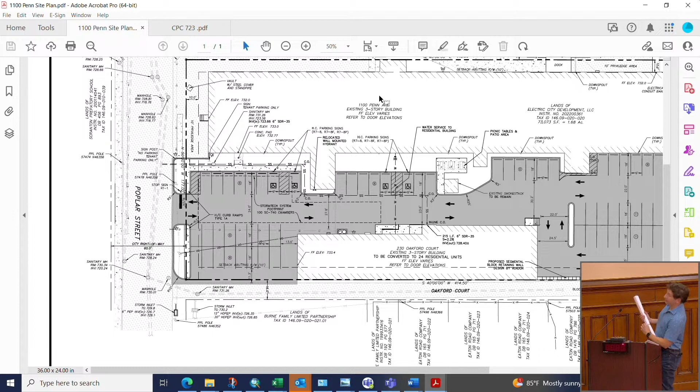Yes. I'm Jude Caldwell, engineer working on behalf of Electric City Development. My apologies, I could not make the meeting last month, but I'm here to answer any questions that may have arisen at the meeting. I understand there were some questions about the landscape plan and perhaps the sidewalks. I did bring with me several copies of both the site layout and the landscape plan, if anyone would like to look. I guess it's right behind me on the wall as well.

Yeah, I couldn't find a landscape plan in my set, so I don't know if... Well, I do have it right here. Okay. If you have the landscape plan, you could just bring it up. We could take a peek at it. So you haven't seen that yet, Don? I couldn't find it in my packet. Okay.

Added a planting strip along Poplar. So the comment was there's a paved area setback, so we have to add this planting strip in between where the parking area is and the sidewalk. So this 5-foot strip right here is part of the landscape, that we refer to as this 5-foot strip in between parking. Okay. So what happens on this side? There's a sidewalk. What's happening here? Looks like sidewalk, but we've got some plants over that too, so.

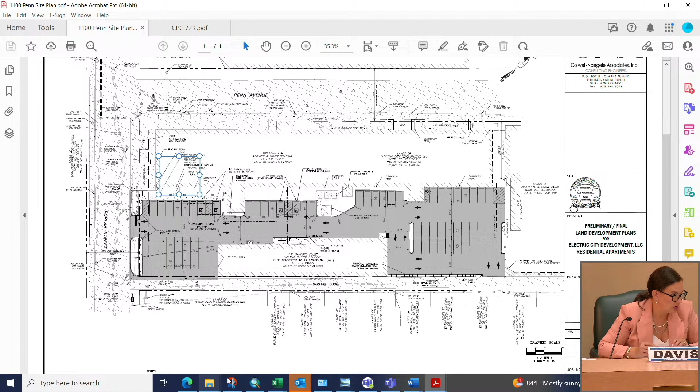And so what is it? So the thought is that we will address the building or... So the project being developed is the conversion of 230 Oakford Court, correct? Which they did have on sidewalks in front of it. And then what is the accessibility?

Don, can you bring up the street view of that lot? Yes. Yeah, I think it's just a parking lot. It's just like asphalt paving that goes from Penn Avenue all the way down to, yeah, so there you go. Yeah, part of that's concrete. Right. This site plan does not show those parking spaces. So those parking spaces are to remain? Parking spaces in front of the existing building. Right.

You said that building's unoccupied right now. We might, I shouldn't speak on behalf of the developer, or maybe somebody in the very front unit. Okay. I'm really not sure, but the vast majority of it is. Right. Yeah, I feel like there's a new-looking sign on the front door there, like Lavelle and Associates or something. Oh, wait, you can see it? Oh, there you go, yeah, Lavelle Strategy Group.

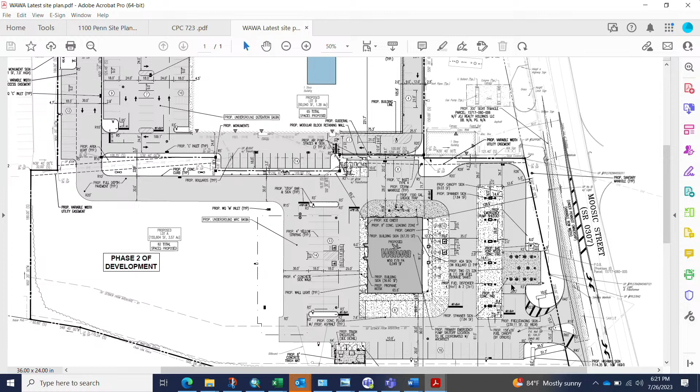Certainly. Good evening. My name is Josh Sewald. I'm from Dynamic Engineering Consultants. We're the civil site engineer who prepared the drawings that are located behind me. I do have a few other exhibits and renderings. We actually rendered the site plan that's located behind you, and we do have architectural elevations too of the proposed Wawa. So at any point in time, after my brief introduction and testimony, if you would like to see those, I'd be happy to mount them on the board or pass them out for you to review.

So overall, the exhibit that you have behind me is the site plan associated with the proposed Wawa development. The Wawa here will be 6,049 square feet. We'll have 6 pumps located along Moosic Street. That Wawa will have 82 parking spaces and all other associated features such as a trash enclosure, a loading zone, and some other items for it to function properly.

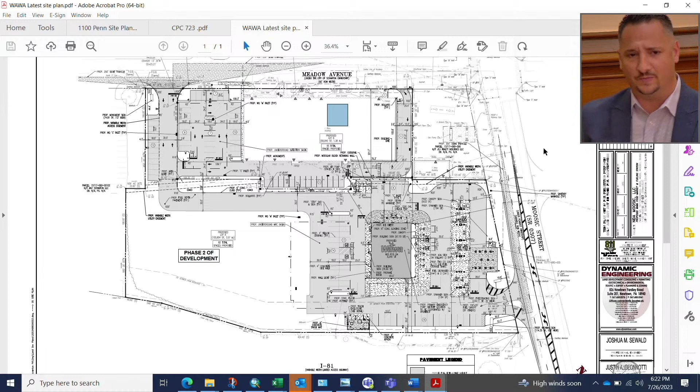As you make your way from Moosic Street out of the right in, right out, and left in driveway, you'll be making your way through the overall development of the Wawa. And then as you continue to further travel south, you'll have that 30-foot driveway that wraps around and heads over to Meadow. In conjunction with the general Wawa development plan, there's been a lot of efforts over this past year working with the ARC facility located on Meadow.

If you take a look at the existing aerial, there's a portion of the building that's actually attached to the ARC building. So as you see on the site plan located along Meadow, what we're doing here is we're proposing a right-in driveway right next to the ARC building and, working with your professionals the past few months, essentially reconfiguring the parking area and taking down the former bank, which is now an insurance company that's inside of it. So overall, some major improvements are coming to the ARC parking lot and circulation.

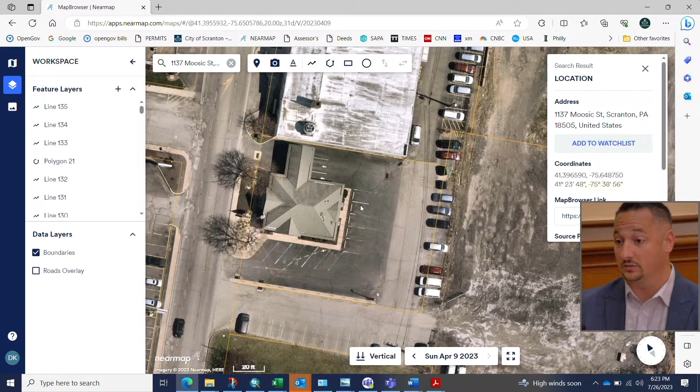With that comes a more modern driveway located on Meadow. Right now, Meadow has one driveway for our property and then a bifurcated driveway for the former bank drive-through. So we're taking essentially 3 curb cuts, consolidating it, and making a more modern and uniform driveway with nice open radii. So overall, that's a very quick high-level summary of the single site plan sheet. I do have a ton of notes here if you guys have any questions about utilities, stormwater management, lighting, landscaping, operations for the Wawa. I'm here to answer any of those questions you may have.

Great, thank you. Don, am I correct, you recently met with the developers too? I know there were a number of things we had discussed at the last meeting that I think you were going to review with them. Any update on that?

The letter that you have in your packet is dated July 20th, so that would have been the most up-to-date review letter. We've had a couple meetings with them going over some of the individual comments. So I think the letter itself is probably the best guideline to be followed. And I'm happy to report that I believe that we have satisfied all of Riley's comments and incorporated all their comments. We do have 3 waivers, which we'll get to shortly, about the request tied to final land development, but I believe everything within Riley's review letter has been addressed. And happy to comply with any remaining, we'll call administrative items that would come post-approval from this board.

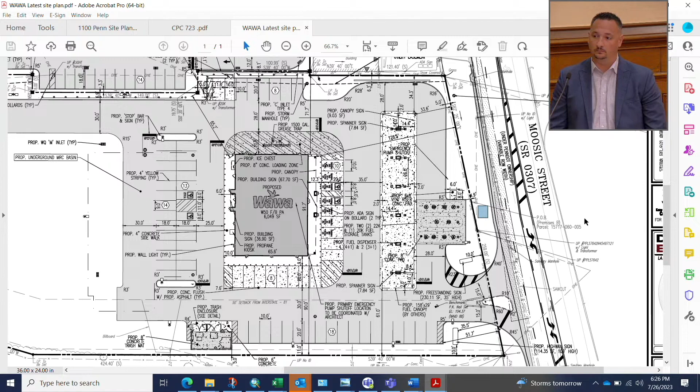Could I ask about the sidewalks up on Meadow Avenue as well? I know there's some existing sidewalks. It was a little unclear looking at the site plan there exactly what the sidewalks would end up looking like. So there is a sidewalk in front of, we'll call that former bank drive-through, that's now the insurance company. In redoing that frontage, we're bringing down the bank drive-through building. We're consolidating those 3 driveways into one driveway. So any gaps or openings between the sidewalk will be installed with brand-new sidewalk. But if there is anything that's salvageable, that'll remain as well. So continuous sidewalk along Meadow, as well as sidewalk along our frontage from Moosic Street. Okay. Thank you.

Well, if I could continue that discussion then. So you've been in discussions with ARC about reconfiguring their parking situation? Very much so, sir. And as part of our land development plans, there's actually a little bit of a land swap. So the application includes their property and our property. In accordance with that, the demolition plans show a removal of that bank building as well as a portion of our building that touches the ARC building. And over the last few months, we've been working with your professionals that we will be proposing a right-in driveway off of Meadow to wrap around the ARC facility and formalize a parking lot for them. So going from approximately 25 spaces for the ARC building up to 65 spaces. And that's associated with the land swap and getting rid of the bank building.

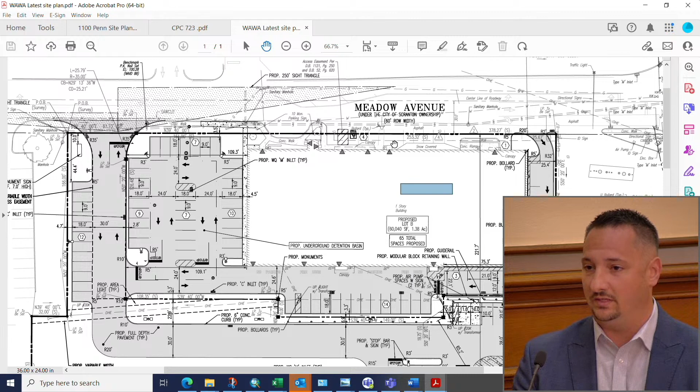And just some further background, if anyone is unaware of the ARC, it is for disabled children and adults. Some of them have physical disabilities, so they like to park up front and come right into the front of the building. The other thing we looked at across Meadow was that our neighboring uses across the street, the Aramark building and a couple of those, have similar parking situations.

So I do agree with you, in a traditional commercial sense, we wouldn't recommend it as an engineer, but because it's an ARC facility and those spaces are not high turnover, it's really just for drop off and pickup of those individuals who are there for the entire day. We don't think there's a major detriment to that. So we would like to keep it as is. And then, like you said, there will be a major improvement so we can get the rest of those parking spaces filled around the ARC facility.

Okay. I've driven by that facility recently, and there do seem to be cars parked there kind of throughout the day. There are parking spaces, yes, up front. Okay. Did I see a comment in the letter about recommending that those be turned into parallel parking spots? Or am I making that up?

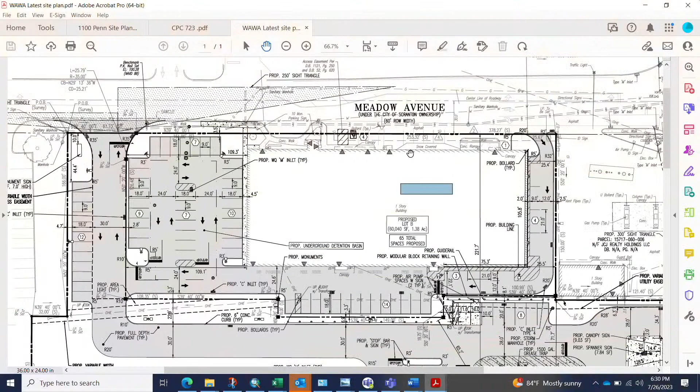There are parallel parking spaces on the northern side of the building. Thank you, Lauren. And as well as, if you take a look to the right, where the number 4 is, that is where the parallel spaces are being proposed. So in existing conditions where those 4 spaces are and the one-way drive aisle, there's actually a building there today associated with the property. That's coming down to provide full circulation around the ARC facility.

Do the street view. So the existing spaces along Meadow would stay there, which you pull into and back out into the street, and then additional parallel parking spaces are going to be added. Is that correct? The parallel will be internal on-site, we're not modifying anything along the Meadow frontage. So where that garage door is on the left, that's being demolished. That is coming down. And that's then a right-in only. Correct. Okay. So all the existing parking there would stay, and where that white car is now, that space is being eliminated.

Correct. Thank you. And so with additional parking out back, there's less of a need for parking in front for ARC. Is that right? Yeah, so it's an improvement to the operations and facility. However, the co-applicant for this is pretty steadfast that they would like to keep those few up front because of the nature of the people that come to that facility. They are hopeful that there will be less turnover. Their employees can park in the back 65 spaces, but just for those critical people that come up front that have some physical disabilities, they'd like to have those few spaces.

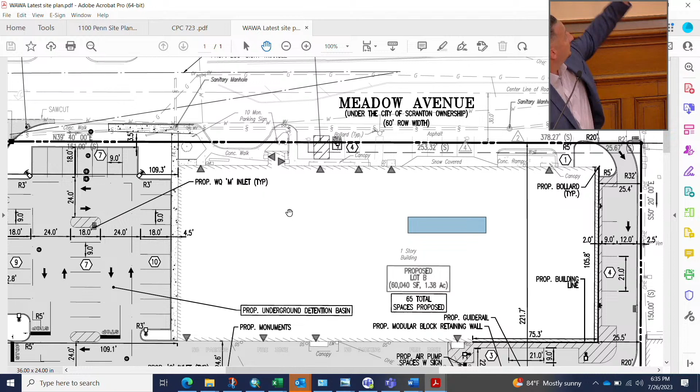So if you take a look at that site plan, you're talking about 8 parking spaces up along the front, and then a little bit of a loading and unloading area, which is, thank you very much, Corey. So you have 8 spaces, which today there's about 10. We're dropping it down to 8 in order to do that right-in driveway. Again, it's my professional opinion that you have 65 spaces now associated with the ARC. Today they have 25. Their building's not getting any bigger. They are simply looking to provide a better parking lot so that their employees don't have to park off-site or park around the neighborhood.

The point of the redevelopment and working with ARC was so that there is less activity up on Meadow. But they were very strong asking to keep those 8 spaces. We can even potentially add some signage that says no employee parking here, or possibly some drop-off signage, but the operator asked very specifically to leave those 8 as is. They claim it's very critical for their project.

Again, we're driving the bus here for the Wawa and making sure we comply with the brand new ground-up development, but there is somewhat of an existing nature to this ARC facility, the building, their operation, and they are limiting us on what we can and cannot improve upon. So Don and Tom, presumably ARC was involved in that last discussion? Yes, that's right.

And so basically, the conversation that we had was about ARC's operation. The previous version of the plan had an out-only driveway on that northerly or right side of the site. And that's a change from the existing situation that caused what we thought were a number of different conflicts. One is the parking would block the sight distance looking to the left of that exiting driveway, and that exiting driveway would be coming out in the middle of a turning lane and near other driveways. So there were a lot of reasons that driveway configuration we think didn't work. Right, but so it's changed now. Right, so then

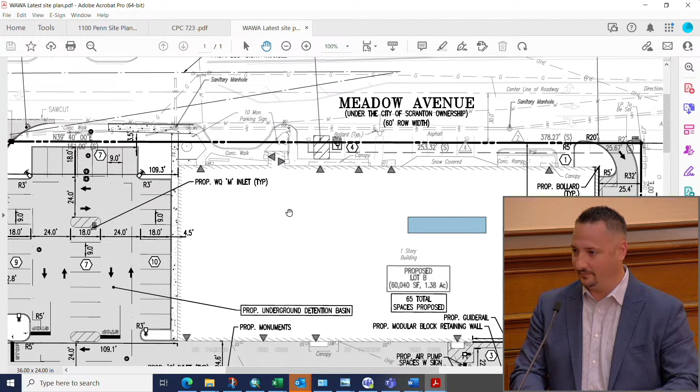The other thing I'd like the board to focus on is there are multiple curb cuts and openness along Meadow. With the addition of the Wawa, you are now restricting those multiple curb cuts and funneling all traffic to one uniform point on Meadow. That improves pedestrian safety because now they only have to cross over one open driveway instead of what is currently right now 3, where there's no radii, it's just open pavement. I certainly agree with you, sir, that there still will be some open pavement in front of the ARC building, just like it is out there today.

With the right-in only driveway that's coming around the building, you now get also a concrete curb island that juts out right up to the right-of-way line, which then further delineates a car traveling northbound on Meadow to stay in their right-of-way. So I hope the board can see from the site plan behind me, as well as some of the testimony given so far, that it is still a major improvement to not just the existing facility, but also to the pedestrian safety. The other aspect of pedestrian safety means you don't necessarily have to have a full pedestrian sidewalk along every single street.

In some more, as you guys know, urban environments, historical areas where buildings have been here for decades, sometimes pedestrian walkways can be going on each side of the street. So this building, in today's day and age, would never be allowed to be this close to the property line. And so because of that existing historical condition, it would be negatively impacting the ARC facility that really has just been standing there for quite some time. So I believe that with the addition of the Wawa development and the redevelopment around the ARC, you are making it safer for pedestrians.

So before, if you take a look at the south side of the short wall of the ARC building, there is now sidewalk along that building with upfront parking. So it is our hope that not just employees, but their residents can come around and then park there and walk on the sidewalk next to that building. So I still believe that the plan shows a significant improvement in total pedestrian safety.

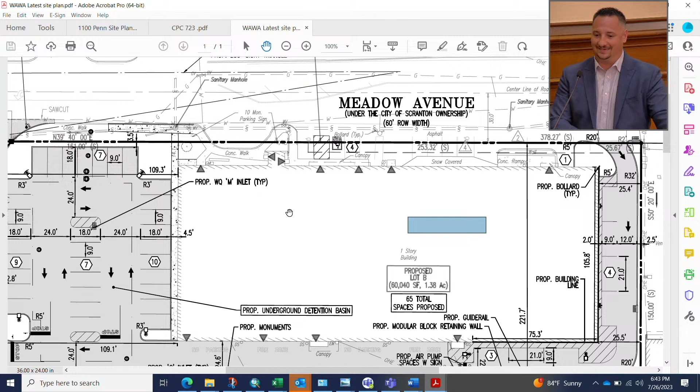It's not the perfect picture, absolutely, I don't want to say it is, but with the redevelopment of this parcel with the Wawa and in the combination of the ARC, it's still a major improvement. The initial plan, the Rev Zero plan, had very little improvements at all to the ARC. We essentially were just sharing a driveway out to Meadow.

So I think over the past year, I was here last year in June at the zoning hearing board, there's been major improvements, also working with your professionals to get to where we are tonight. So I certainly don't disagree with you. I believe that there could be further improvements should we be knocking down the ARC building and pulling it back from the road. But that's not the application.

The application is taking what I have up front and trying to make all of it around as best as I can. I think we've done that on 3 of the 4 sides of the building that's existing today. So if you pull the plan out, if you could pan out. So we talk about, what are going to be pedestrian movements that are related to the Wawa, and how are they accommodated?

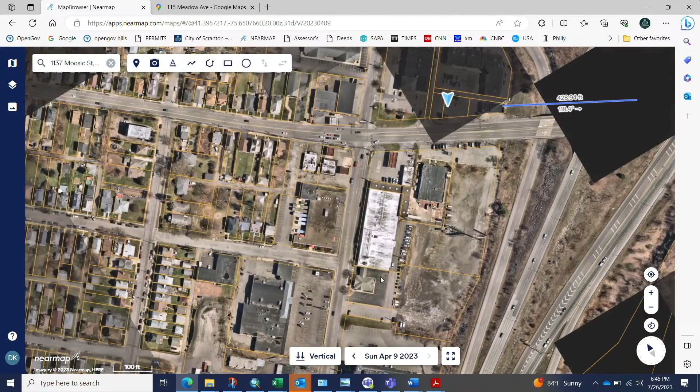And so, because people will walk to the Wawa from the neighborhood. So Don, if you could go to the Google map overhead view, just wondering if there's any, so if you pan out farther, so you're not walking to the Wawa from the east, because that's 81. So it's sort of similar to like,

even though it'd be nice to have more pedestrian facilities parallel with Meadow Avenue, why isn't it a big deal that they aren't there, even though we have a lot of retail? And I think the reason is that the people who are walking to those establishments are from Southside and have sidewalks on the various streets that are perpendicular to Meadow Avenue.

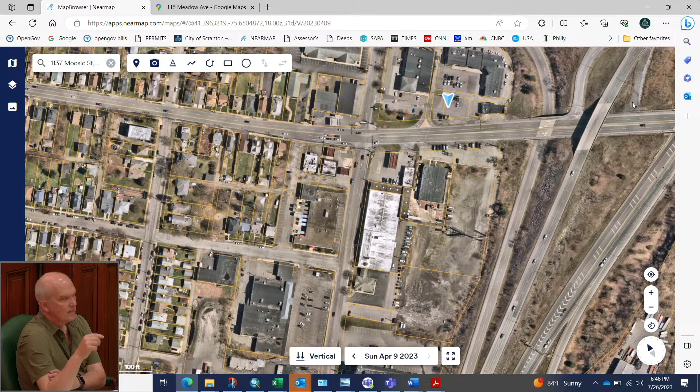So when you look at the big picture, if you live in a neighborhood over there behind the shopping center and you're going to walk to Wawa, how are you going to do it? And so that's why I'm wondering if what you really need is a pedestrian accommodation on the Meadow Avenue main, full access driveway. Because if you live in that neighborhood, you can walk to Garrity's without walking on Meadow Avenue. You can walk to the liquor store, the pizza place, without walking on Meadow Avenue.

But if you're going to walk from that neighborhood to get something at Wawa, and you don't want people walking on the street, you're going to walk up. No, so they'll be making their way down to Moosic Street and then crossing there. So you're actually more concerned about people from the hotel. I think the sidewalk we're talking about is really for people coming from the Sheraton. From the hotel and from East Mountain that come across the bridge on River Street and make a right onto Meadow. Yeah, that's true.

Avenue. Right, so first, I guess the point I was getting to, which then could get extended by Gus, is should there be pedestrian accommodations on the, call it the main driveway off of Meadow Avenue?

So while your professional was talking, my traffic engineer and I were discussing that it could be accommodated to provide a pedestrian walkway from Meadow through the new parking lot where the previous bank building was, and make its way up through the drive aisle of the Wawa, so it'll be out of the drive aisle, and to get you towards the loading area right where the front of the building would be. So that way, if you have anyone coming from the hotel or anyone walking on Meadow that wants to walk into the site. Thank you, Mr. Chase.

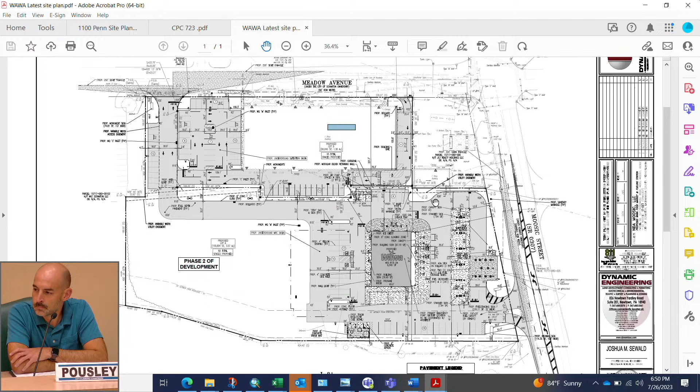So, right, if this was just an ARC project with parking lot modifications, it wouldn't be before the board. There'd be a stormwater management plan approval, but it wouldn't be a land development plan. But as it is an integral part of this Wawa project, it's part of this. So I think that was part of the reasoning in saying, when we're looking at the situation on Meadow Avenue, first of all, don't make it any worse. Don't downgrade the safety at all.

But when you look at the issue of pedestrian safety and Wawa, which we look at a lot when we're doing any kind of retail that people are going to walk to: how are they going to get there? Because you want them to have a safe path.

Yeah, and especially since one of the accesses is right after you pass the ARC, having a sidewalk that goes there seems to me like it's really something that should be within our purview. Having said that, if they've come up with this other alternative to go behind ARC and have a separate paved walkway that has some sort of a barrier or protection from the cars that are coming around, I think that could be a good alternative. And in some ways, it's more protected because you're not walking so close to Meadow Avenue. So people coming from East Mountain or from the hotel have this sort of back way pedestrian experience.

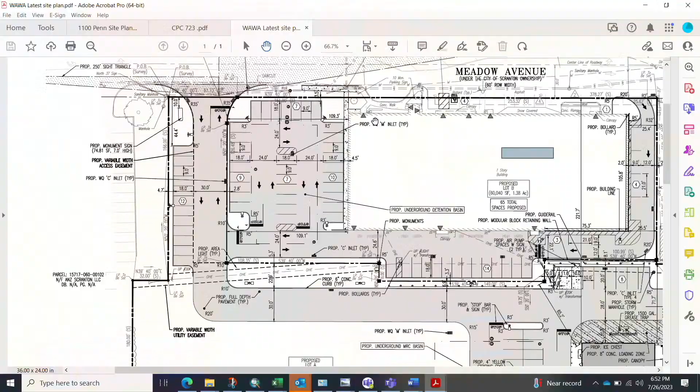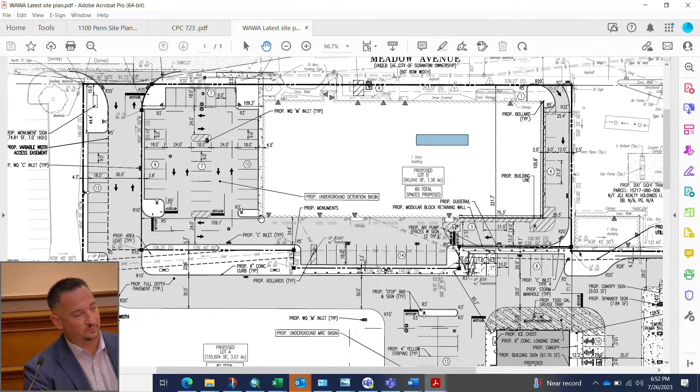So while I have the microphone, we're talking on Moosic Street, when you said there were sidewalks there, you also said something about striping. So there's going to be no place where what could be a potential sidewalk is replaced by just paint, right? Yeah, so you do have to cross drive aisles to get from Meadow into the Wawa. So, Corey, if you could use your laser, starting from Meadow Avenue, you go along the sidewalk along the ARC, and then you'll have striping to cross a drive aisle, and then we'll come up into landscape, run a sidewalk along the Wawa drive aisle, wrap around the pumps, and then come down. I'll have another striping to get you into the front of the Wawa store.

Right. But I was talking about sidewalks along Moosic Street. So we are going to propose sidewalks along Moosic. They're not in the plan right now, but part of the last call that we had with your engineer and Mr. King is that we will provide them within the PennDOT right-of-way. Okay. But I thought you mentioned something about having striping instead of sidewalks? It's because anytime you have to cross an access aisle, it's not going to be raised. It's just going to be a delineated crosswalk. It tells pedestrians where to stay in the lane. It also is a delineator for the cars that someone could be walking in here, slow down, just a traditional crossing of a drive aisle. In the driveway. Okay. Correct.

All right. Thanks. You mentioned that you had renderings of the proposed facility. Could you share those? Unless there are still additional questions on the site? If you'd keep the easel behind you there, because that's where the cameras can pick it up. We have three. It's just a site plan rendering. Same orientation as you see behind you. You have Meadow Ave on the top, Moosic on the right side.

Anything green that you see will be future grass and landscaping areas along Meadow Avenue, and the tan light orange color is the existing ARC building, and then the darker orange color is the proposed 6,000 square foot and change Wawa. The skinnier lighter yellow color is the gas canopy associated with the fueling station.

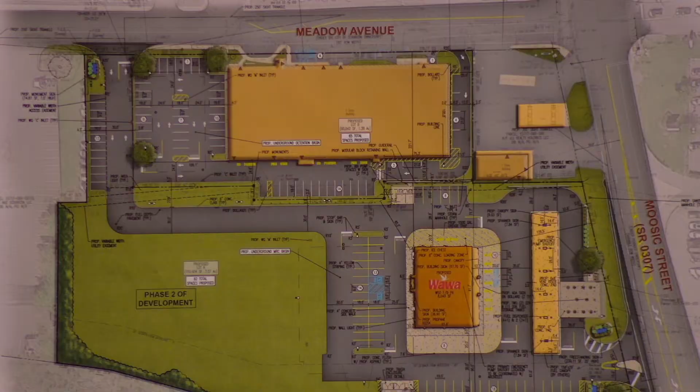So full movement driveway on Meadow, access aisle. We'll come up to the Wawa facility, have approximately 82 parking spaces for them, and then we have a right in, right out, and left in driveway for Moosic Street. The ARC facility, as you can see here, does have a sidewalk that wraps around and comes up front. Those are those 8 spaces we were just discussing of concern.

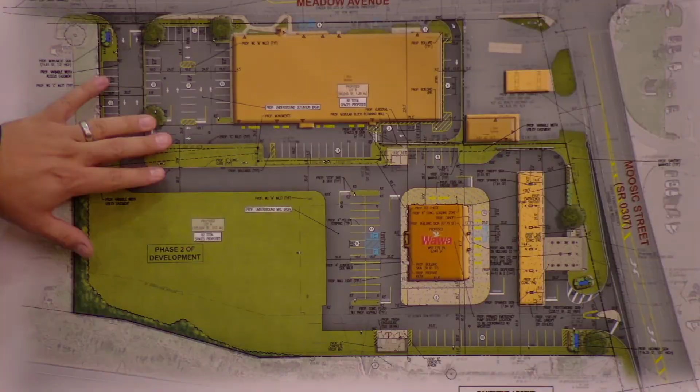We were discussing having essentially a walkway coming through the ARC on the south side of the building, crossing over, and then in this grass area, we would then provide that sidewalk, wrap around the pumps, and then tie into the front of the building right here. So this is just a site plan rendering to give you an idea. Sometimes it's tough to see the black and white lines and gray areas of a plan, what the overall buildings will be.

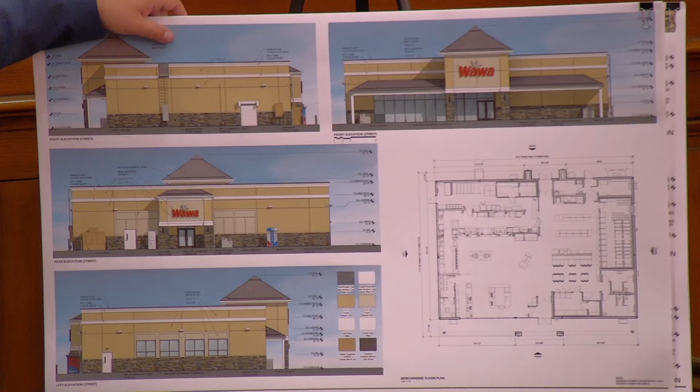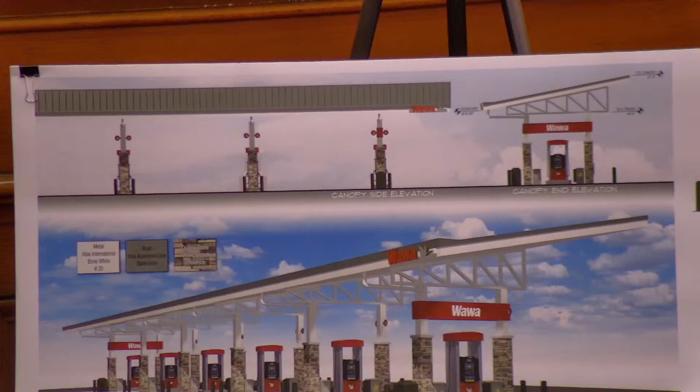And then the third rendering we brought this evening is what the canopy will look like, as well as the separate trash enclosure area that's located behind the building. So same thing, you do have various cultured stone at the bottom of the columns of the 6 pumps, and then you have the angled traditional Wawa canopy with some of their logos and, of course, the goose.

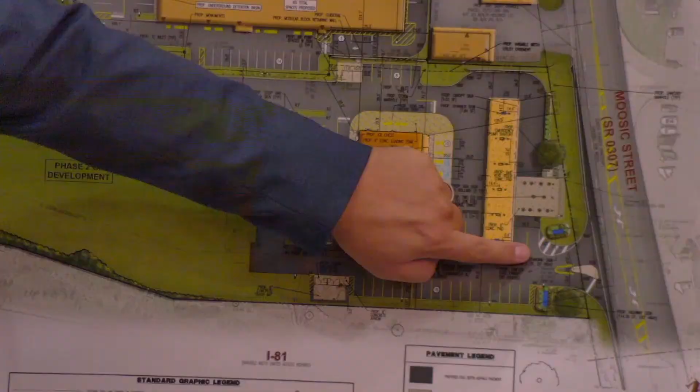Great. Are there other questions, comments? Well, on the rendering, can you show me where the gas pumps are on the first rendering? So anybody walking along Moosic Street will have to be navigating cars that are pulling in and out of there, right? Where would the sidewalks be? So this is our access aisle in front of the canopy, and then you have a nice 30 to 40 foot grass island there separating the gas area from Moosic Street. So the only car impact will be associated here at our driveway.

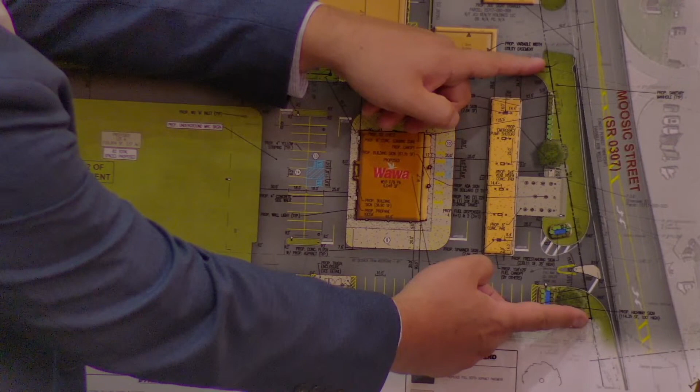So if you're walking from the corner of Meadow and Moosic Street, where would the sidewalk be? How would you walk into that Wawa? So our frontage is only here. We'll have a sidewalk from our property line up to this property line. There will be a striped crosswalk when you cross the driveway, and then we can have an interconnection to get you into the Wawa parking area. Yeah, because most people are just going to cut right through. They're not going to walk all the way down to the bottom of your picture. We agree the request was to provide sidewalk frontage along all of Moosic Street.

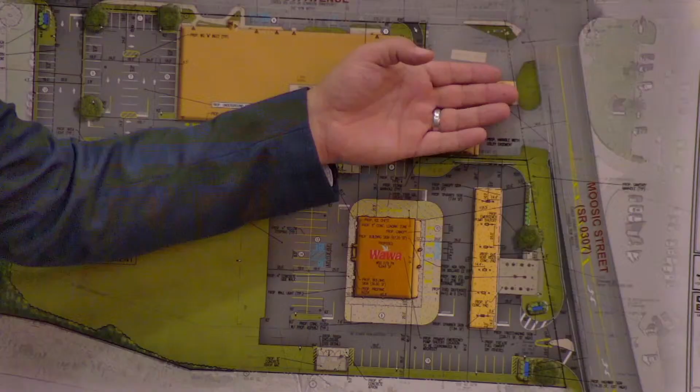Could there be a sidewalk perpendicular to that, just connecting down to here? You're saying into the paved area? Yeah, down at kind of the curved corner there. Yes, with the condition that the connection is bringing you into the Wawa area. There's not a lot of room between our property line and our neighbor's property line. There's also a grade differential and a retaining wall there. So we can certainly connect to Moosic, but it'll come into the Wawa. Okay, where exactly is the retaining wall going to be located? It is located on the western side property line. It's located behind the existing food market. Yeah, okay.

So I think there's the potential to tie in that sidewalk that's going behind ARC with the sidewalk that's going along Moosic Street. There's not a potential for that. You'll have to go through the Wawa parking area in order for a pedestrian to go between each different right of way. It's not uncommon to have someone walking, just the same way that you leave the food market, you walk through the access aisle to get to your car. It's the same type of safe maneuvering for a pedestrian access way. That's why we were saying a lot of the areas may just be striped.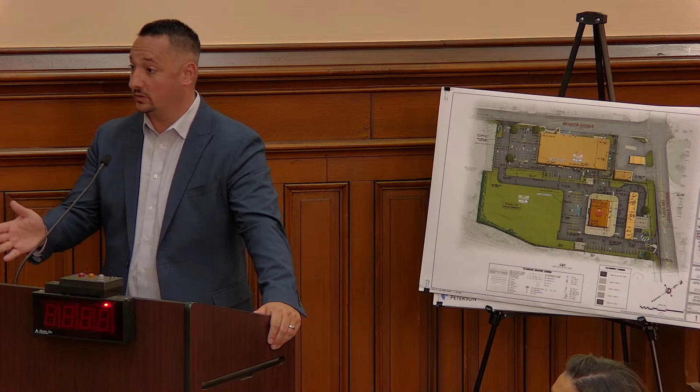Think about it like this. You have 6 pumps located in front of the Wawa food market, 12 locations for a car. And a lot of times, the reason why the C-Store food market fueling station brand is successful is you park your car, you start filling it up, and then you leave your car, you walk across the access aisle to get into the building. There's not a separate sidewalk or a striped walkway between there. There's already a natural attenuation between the canopy as well as the food market.

In addition, to the back of the Wawa, you have a supplemental parking area. Same thing. People will be walking around the Wawa just using its operation. So in my professional opinion, you don't need a dedicated separate sidewalk between every single point of the right-of-way because of the nature of the use. If this was an industrial facility with tractor trailers backing up, of course we would want a dedicated, raised, protected barrier. But that's not how a Wawa or a gas station operates.

There's always pedestrian activity associated with a gas station, the food mart. So we're happy to provide a quick connection from the Moosic sidewalk into the Wawa lot. And then once they're there, you won't be able to tell the difference if their car's fueling, if they're parked having a cigarette outside, or if they're just a pedestrian coming off Moosic to come walk in themselves. It'll be the same type of interaction.

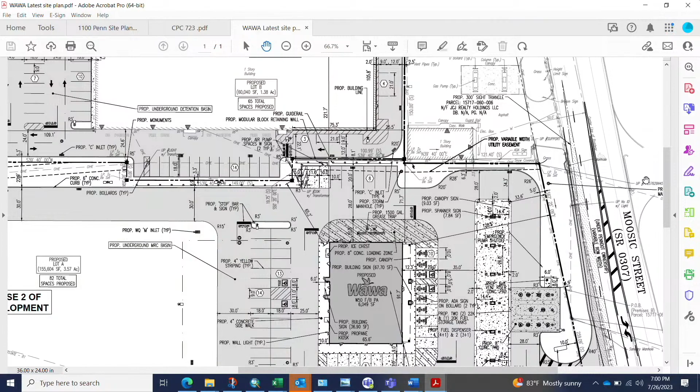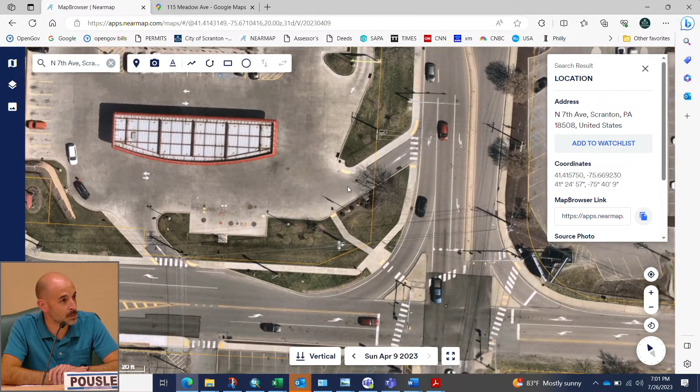Great. I for one am pleased with your flexibility in what is definitely a difficult situation to work with. There doesn't seem to be an ideal, but I'd be comfortable with the addition of the sidewalk and pathway that we discussed from the Meadow Avenue side down into the Wawa property, and obviously you've already agreed to add the sidewalks on Moosic Street. A short connector sidewalk from the Moosic Street sidewalk into the Wawa parking lot, I think, is a big improvement, and perhaps the best we're able to do considering some of the other properties around there.

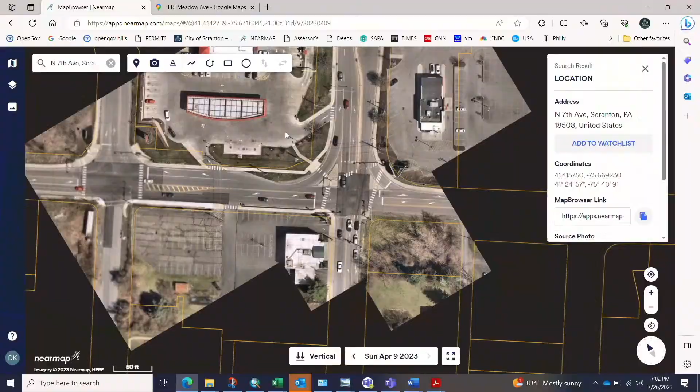So like this example here, the sidewalk from the crosswalk just goes into the apron area. Exactly. That looks like a Sheetz. Yeah, this is Sheetz, down by the expressway. The applicant will not allow me to say that word on the record. But the intent of it is, if you didn't do that, the path would be worn in the grass. Correct. So it's like when you see a college campus and they have sidewalks crisscrossing, everybody walks through the grass straight. Just the places where the grass gets worn out. Yeah.

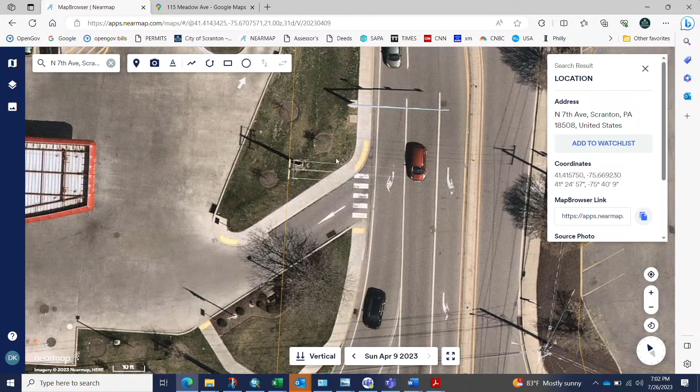You're still awaiting your NPDES permit? Yes, we've been through a couple rounds, but that should be wrapped up in the next 30 days. Okay. When do you intend to start construction with all your approvals in place? Mark and David would probably tell me tomorrow if they had all things in hand. Okay. Tom, did you have any additional comments on the stormwater plan, or is it just pending the NPDES? It's in review. That's correct, at DEP. I think we've addressed all of your review letter stormwater comments, and we're waiting on the final technical review from PennDOT and DEP for stormwater. They're traditionally a little slower than you guys.

All right, well, I'd be happy to make a motion. This would be for conditional approval, is that correct, Tom? Right, you would make a motion to approve with the condition that they add sidewalks on the Moosic Street frontage and a sidewalk connection from Meadow Avenue. Well, at what point do we take public comment? Is that before a vote? Yes, absolutely. And so those are the conditions, plus those two outside permits. And I think you were saying before you entertain that, you wanted to open up for public comment. Sure. Would anybody like to make a comment?

Just some quick comments. Jamie Hailstone, I represent CF Marts, who owns the gas station contiguous with this property. The HOP, the Highway Occupancy Permit process, is still in process. One of the things that PennDOT is requiring at this point is potentially having to widen Moosic Street. I think that's important for the board to know because that's going to change a lot of these lines.

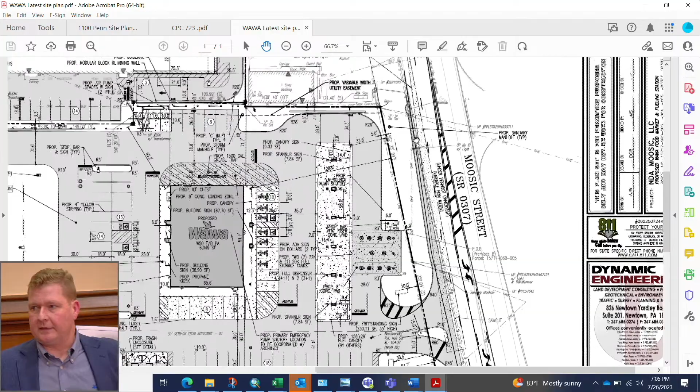If they're going to be able to put the center turn lane, PennDOT is expecting them to widen that. Also, PennDOT is talking about requiring the city to sign off on having a center turn lane on Meadow Avenue also. That's something that they were supposed to bring to the city. I don't know if that was brought up or talked about yet, but that's one of the requirements that PennDOT also has with the HOP process, which again is in process, and they've been through a lot of back and forth.

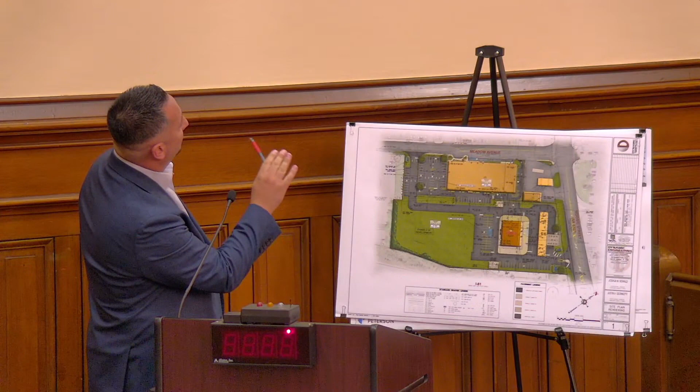Certainly. That will be an ARC driveway only. Could you theoretically come in, circulate, and then head back out that way? Yes, but it is meant for the ARC property. As you can see, there's a bold black line. That is a subdivision line, giving ARC their property associated with their right-in and their new parking lot of 65 spaces. But they will, of course, have access to the shared driveway that goes out to Meadow.

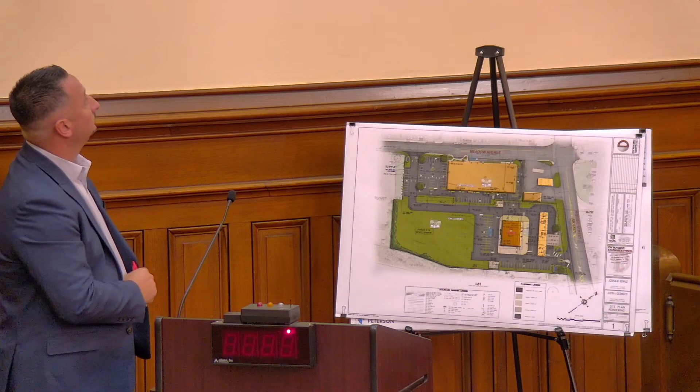And there's curbing between the back of the ARC property and the Wawa property along that line there? Absolutely. That's all I have, other than to also point out that the HOP application is for a 6,000-foot gas station and convenience store and a 5,000-foot fast food restaurant. And that's not before you, but that's in their application for the HOP.

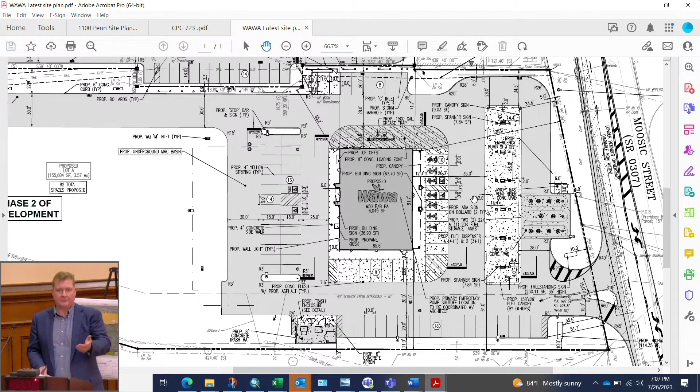I'm confused by that also, that they're bringing something to you and something different to PennDOT. I also have a question about the overall price of the project. I know that's something that's in the record, but I haven't seen it. I'm just the engineer, so I can't talk about price of the project. But the HOP permit is contemplating a certain number of trips associated with the driveways for future Phase 2. We're not here tonight to discuss Phase 2 because, transparently, we don't have a tenant yet.

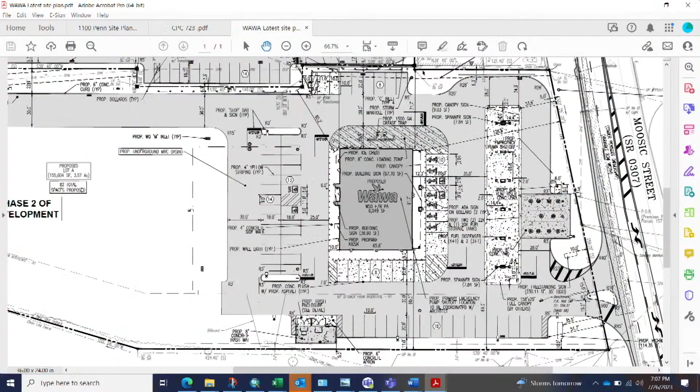We have a signed lease with Wawa, who is eager and excited to come to the city of Scranton and come up front. So we are in for final land development before your board, because should you approve the plans that are in front of you, that's what could be constructed. Should at any time the back half, the Phase 2 area, get approved for something with a potential tenant, then we wouldn't have to go back to the HOP process. But we would have to come back before your board for that land development phase for Phase 2. Corey, did I miss anything you wanted to add?

Josh is always doing my job. Good evening, everyone. Sir, I'm Corey Chase with Dynamic Traffic, and Mr. Sewell was correct. PennDOT requires us to make a certain assumption when there's a Phase 2 for potential development. They want to limit the amount of times we go through the HOP process as much as possible. So Josh was correct in that we made some assumptions for potential future development. Obviously, that's not before the city.

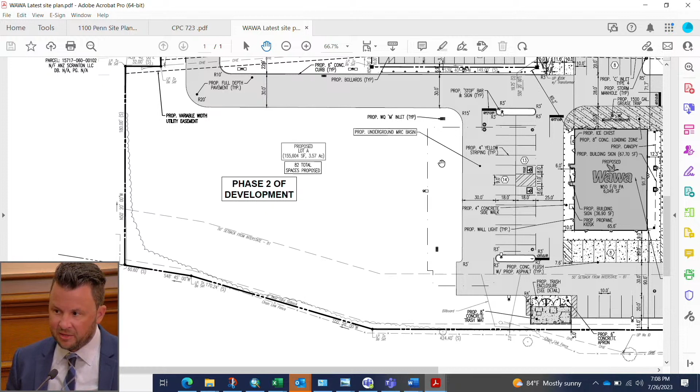The hope would be that if there is potentially a Phase 2 development in the future, those trips would fall under what we had assumed as part of our original HOP, and therefore we wouldn't have to go back to PennDOT for any additional permitting. Their preference is not that you install a driveway and then 2 years later you have to rebuild that driveway to do some additional improvements. They really encourage us to do sort of a worst-case scenario assessment and do that as part of the initial HOP application rather than doing it in steps and multiple iterations.

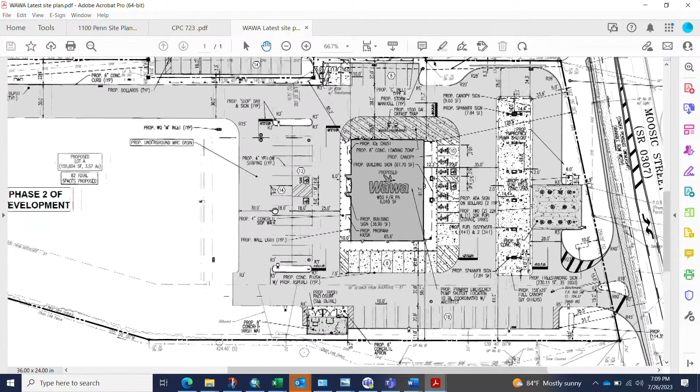And just a point of clarification too, you can actually see on the plans the widening on Moosic Street is shown in the dark area, so that's already contemplated on the plan, so there is still sufficient area between that widened area and the right-of-way line to provide that sidewalk area. So that widening, as was mentioned by the attorney, is actually depicted on the plans currently, so there is still sufficient area to accommodate that sidewalk that was requested earlier this evening. Thank you. Thanks, Stephen. Any other public comment?

All right, so I'll make the motion to recommend final approval with the condition of the sidewalk installed on Moosic Street with a connection to the parking lot, as well as the sidewalk and pathway from Meadow Avenue as we discussed it. And the issuance of a PennDOT HOP permit and the issuance of a DEP NPDES stormwater permit are also conditions. Correct. Yes. All right, motion on the table. Do we have a second?

I'll second. All right, any further discussion? Just one small comment. I'm a little concerned, thinking back to the sidewalk that's behind the arc now that's being proposed. If you're replacing a green planting with a sidewalk, is there still any barrier? Is there room for a barrier then, green or otherwise, that protects pedestrians as they make their way through a car-centric area?

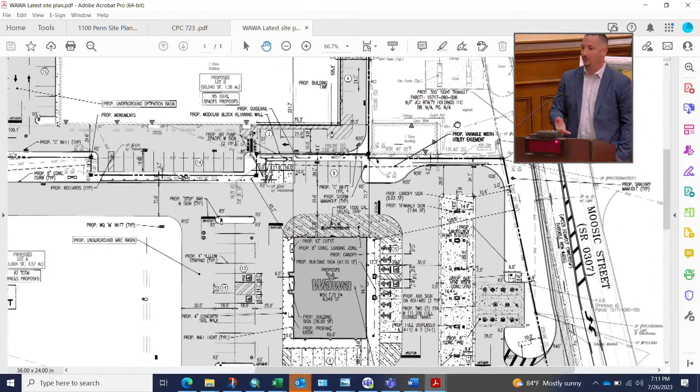It's the traditional sense of sidewalk, right? Your sidewalk on Meadow Ave is right next to the travel public right-of-way. So our sidewalk that will go through this parking area is not going to have a barrier. The nice part is when it is going along the 30-foot drive aisle, it will be raised above the 6-inch curb. I never like to call a curb a barrier, because if you hit it hard enough, you can hop it. But if you were to move over, you would hit the curb and then come back. So the sidewalk along the 30-foot drive aisle will be elevated.

But once that striping comes into play, you will be at grade level with the ground. The crosswalk is a delineation. It comes from the MUTCD. You have to angle it, and it has to be a certain width of striping and a certain thermoplastic painting to pop, so that anyone driving that area provides a safe and efficient maneuver for pedestrians. Okay, thanks.

All right. Don, would you do roll call, please? Ms. Davis? Yes. Mr. Finnerty? Yes. Mr. Fahey? Yes. Mr. Chairman? Yes. Great, thank you very much. Thank you. Good luck with it.

All right, next up, under new business, review of final land development plan by HAZA Development for the development of a 2,176 square foot Taco Bell fast food restaurant at 733 Davis Street. We have someone here to discuss that project? Yes, sir. Great. So, is that the Taco?

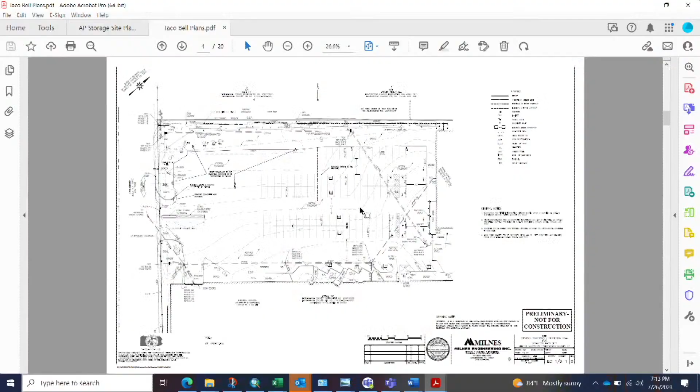Good evening. My name is Lindy LaRue. I'm with Milnes Engineering, the representative here tonight for Taco Bell. We've proposed a 2,176 square foot fast food restaurant located at 733 Davis Street, in an existing plaza in the light industrial zoning district. We have gone through a couple iterations of comments with the city engineer, and I believe we have most of the major comments ironed out. Today we received a new letter requesting some sidewalks, and after speaking with the developer, they are certainly willing to add those additional sidewalks along Davis Street.

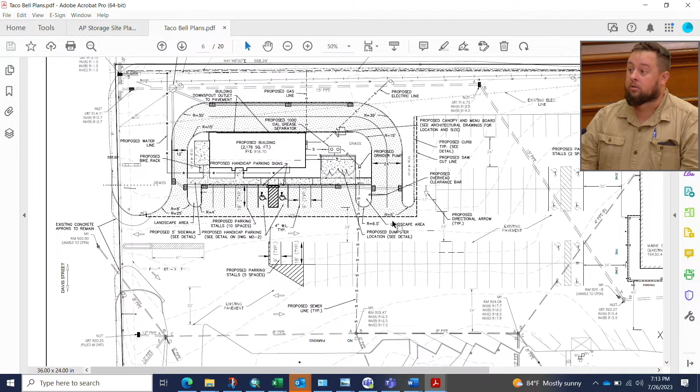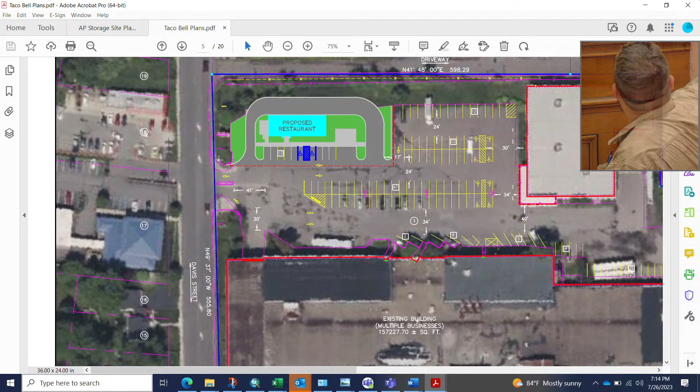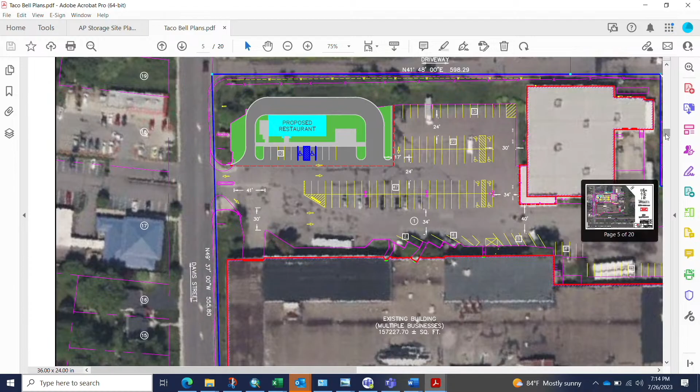There was some question, if we can bring the aerial photo up, about extending that sidewalk past the industrial building that's on site. The question the developer had was whether they needed to extend past the existing industrial building. Past that building is the cemetery. There's quite a bit of utility in the way coming down through there, and past the cemetery we have just the entrance to 81. If you bring up the street view, the other side does have full sidewalk. There's no crosswalks that come across. I believe the last sidewalk is the Dunkin' Donuts there.

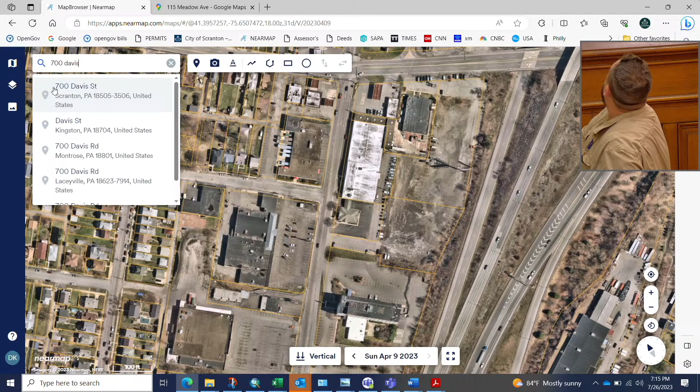Do you have any recommendation on that, Tom? If you pull up the street view there, it doesn't seem feasible to fit a sidewalk in. Yeah, that was one of our concerns, with the utilities that were there. If you rotate more to the right, you could obviously fit a sidewalk right there, but you start to get into this grading, and then there's no sidewalks along Cemetery or that side of Davis Street until you get to the convenience store. It just doesn't seem like there's room to fit it. But I think there's definitely value in putting the sidewalk on the west side of the driveway across the front. Yeah.

Yes, and the developer was aligned to adding that sidewalk with the condition that he would be able to turn it into the proposed sidewalk he has for the outdoor seating of the Taco Bell, which would eliminate a lot of cross pedestrian traffic through the entrance of that plaza, as it does get some traffic right now for the grocery store in the back. By having that sidewalk turn and come in, it would eliminate traffic going to the Taco Bell, and we could cross traffic through the sidewalk to get to that grocery store as well. They are willing to extend the sidewalk up to this entrance if that's a request of the commission.

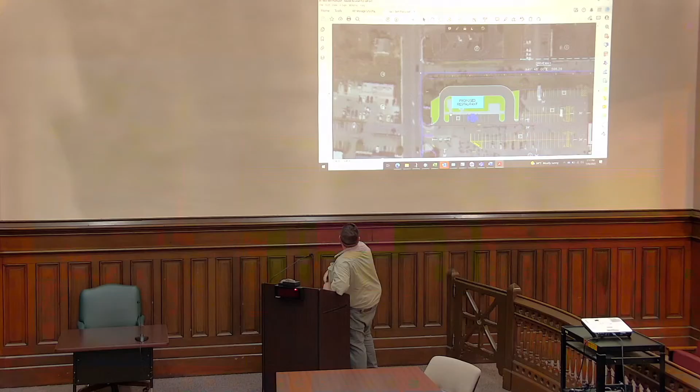But then, like you're just saying, you'd have one that was a stub or connector that was pointed at the restaurant. Yes, if we could bring up the site plan that you had up there before, you may be able to see it a little easier. Yes, we would request that we could bring the stub just to connect into the sidewalk that's proposed in front of the Taco Bell now. There is an existing sign there that you see in purple that is being removed. That sign was put up, and the owner of the lot is requesting that to be moved by the tenant right now.

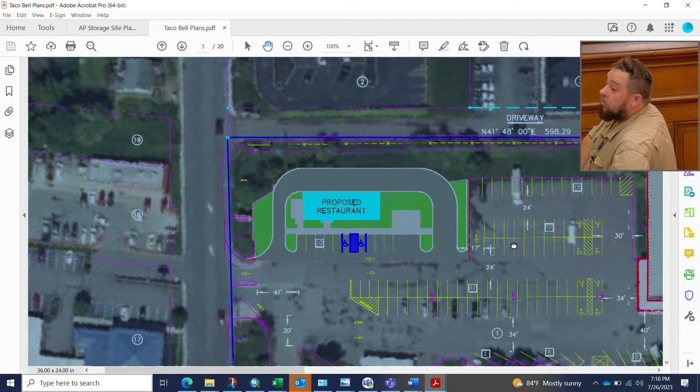So right now, people walk to the grocery store that's at the end of that site? So right now, there are no public sidewalks on site whatsoever. Right. No crosswalks from the other side. The other side of Davis Street has full sidewalk down the entire frontage, but unfortunately, right now, there is no crosswalk across Davis Street. Right.

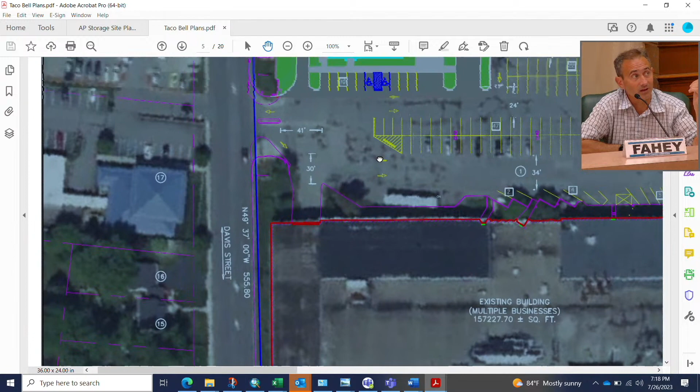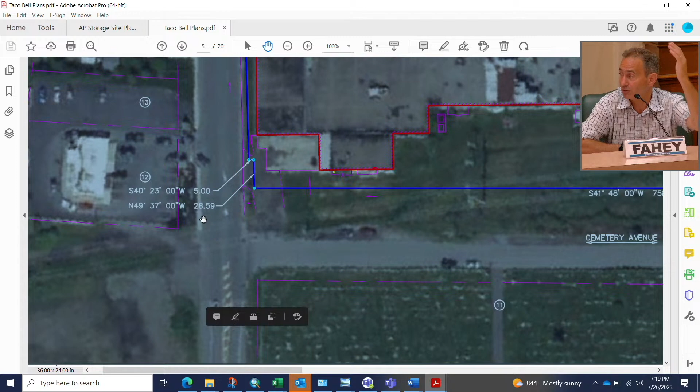I mean, I have to say, I agree with Tom that there's nothing to walk to after you get to that thing. So unless people are walking to the cemetery, which I don't think anybody does, and then past that, it really just goes up to Pittston Avenue and then 81. Yeah, and if they want to walk to the cemetery, there is a sidewalk on the other side of the street that could be utilized. They'll have to cross Davis, but.

Well, I think the sidewalk actually stops directly across there. That's the Dunkin' Donuts, at the end of Dunkin'. Yeah. Right. Is it right there? Okay, so that's where the sidewalk is? Yeah, and that's right at the intersection of Cemetery. It doesn't look like there's really sufficient room alongside that building for the sidewalk. Right, with the utility poles.

Directly behind that building, the property line ends, and it's actually an older abandoned railroad right-of-way that runs through there, so that's off of the property. So even if we were to put sidewalk there, we'd have to end short of the intersection of Cemetery. That's this area in here. Yeah. Is the railroad. Yeah. Well, I think at least providing a new sidewalk across the front of this property along Davis Street improves the situation from what it is now.

But Jen, are you saying like the entire length, or are you just saying to where that sign is, basically? Yes, up to that driveway entrance. Right, okay, yeah. So that's where I'm at. But I am wondering, and this might be out of the scope of the project, whether there's a painted sidewalk that sort of takes you across the parking lot and gets you to, is that a grocery store or something that's there? Yes, yep, it's the grocery store in the back.

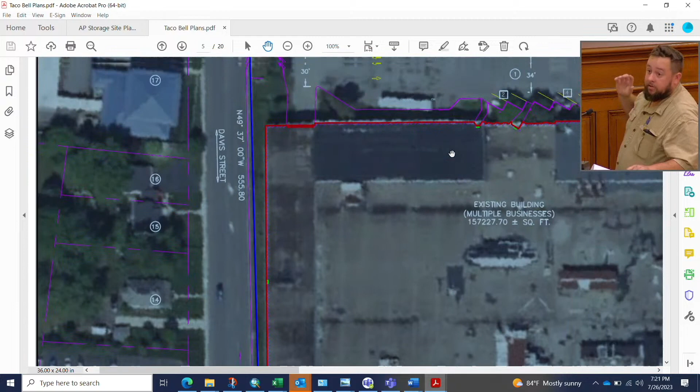Certainly, the safer route would be to utilize the frontage of the sidewalk of the Taco Bell, as there is parking out front of the Taco Bell. So if we were to wrap this sidewalk around near that stop sign, and someone was to walk straight back from there, they would be walking through the drive aisle, which is why we had talked earlier this afternoon with the developer about stopping the sidewalk short and returning it into the Taco Bell sidewalk. That way they would have to walk in front of all the parking. They would be out of all the drive aisles.

Okay. Instead of taking the sidewalk all the way to that intersection, we would stop short, turn it in, and funnel all traffic through the Taco Bell. It keeps them out of the drive aisles for at least the bulk of the property. So are you saying this area here? Yes, sir. So there's a drive-through? There is a drive-through there, yes.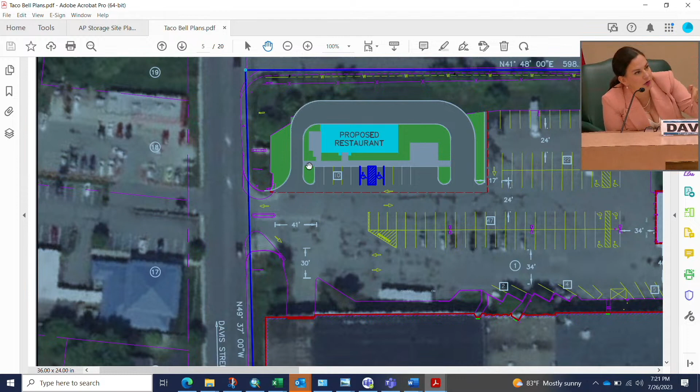Okay, and the pickup is, so people come around that corner, and I guess if it's a crosswalk with a stop sign. Yeah, so all traffic would be stopped at the pickup window in the back, and then we would put a delineated crosswalk through that drive-through exit. I think a stop sign there also. Yes. We can certainly add a stop sign.

Yeah, what we can do is we can add a painted stop bar on the pavement as well as a stop sign. Okay. That way there's not only a physical sign, but a painted visual on the pavement as well. I think that would be sufficient.

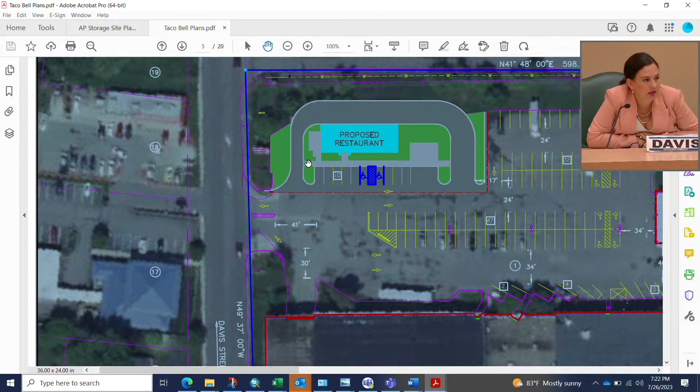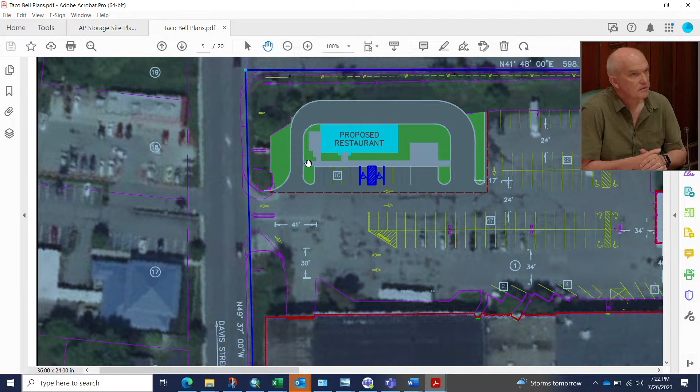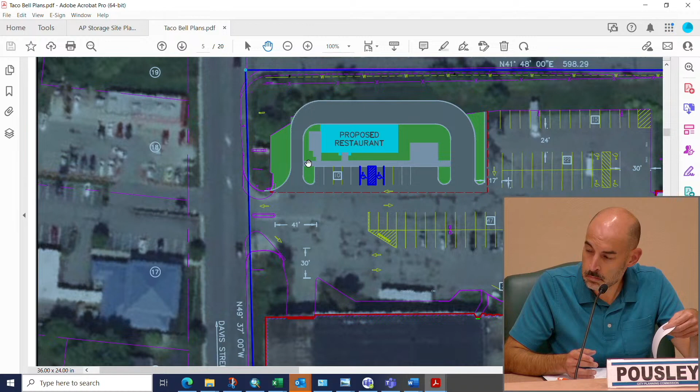Tom, I noticed quite a few of the stormwater related comments still needed to be addressed. Anything you could say about that? So they're requesting a waiver from some of the volume control requirements in the ordinance based on the net reduction in impervious area with their proposal, as you can see with some of the green highlight there. So we're recommending that waiver be approved. And there are some minor comments on some of the stormwater notes that need to be addressed.

Yes, one of the original comments, the way that the ordinance was written, the first comment about the rate control was about sizing the stormwater pipes to the 100-year storm. We responded back to that comment. There's a 15-inch discharge pipe. So right now, the way that the plaza is set up, all the water sheet flows to a ditch, which I'll call the north side of the property, the way that it's facing you.

So all the water sheet flows to the north side, funnels down a ditch, and then through a conveyance system that's also there on the north, just south of that yellow water line that you see, and hits the stormwater system through a manhole. What we're proposing to do is capture the water before it hits the new restaurant, place it into catch basins, and tie into the last manhole that's there. That manhole currently has a 15-inch pipe to it. We were asking not to size pipes, but to tie in with a 15-inch pipe as well, knowing that we couldn't put any more water into that system than what the pipe already allows us to do.

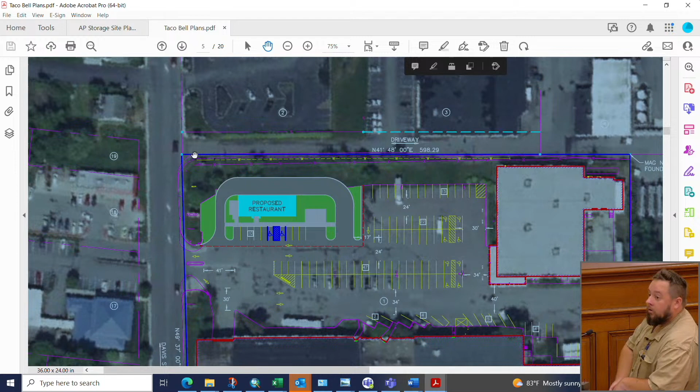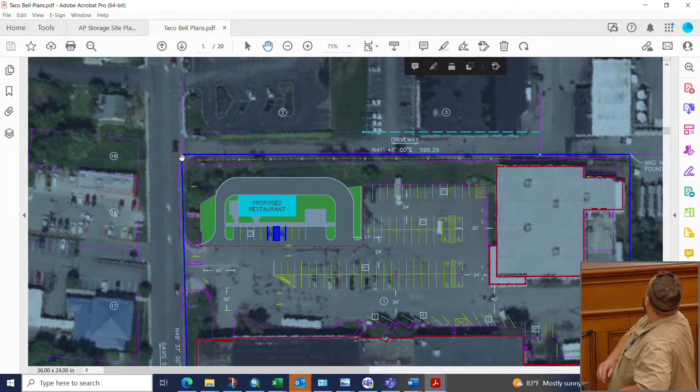And that's a dedicated storm line in Davis Street that you're tying into? Yes, sir. And by what percentage are you reducing the impervious coverage that exists now? I believe we're adding around 2,000 square feet of pervious to the entirety of the site. And do you have a landscape plan? We do, yes. Should be Plan LS1. There we go.

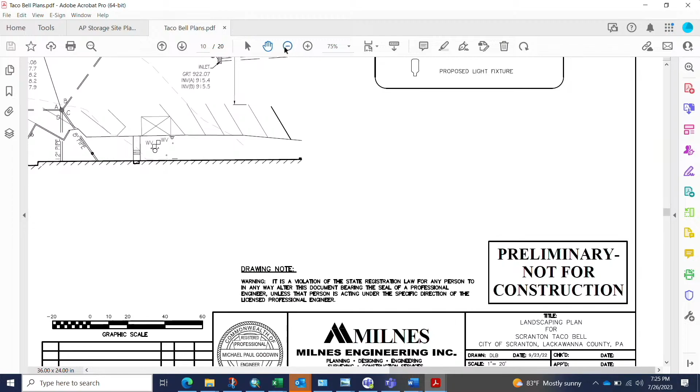So this plan will be regenerated with that sidewalk as well. We are adding some trees around the outside. We did have to take down a couple trees to fit the project in. However, we are adding some new trees, some new shrubbery out front, and plantings. We will have plantings and screenings called for around the dumpster enclosure as well. And then the area directly behind and surrounding the dumpster enclosure is all grass, as well as the curb island to the left and right of the drive-through entrance.

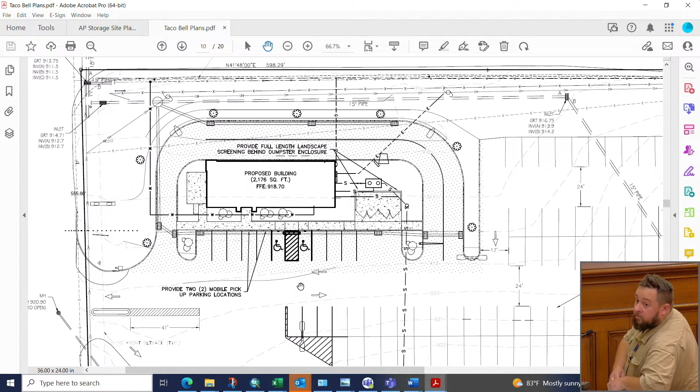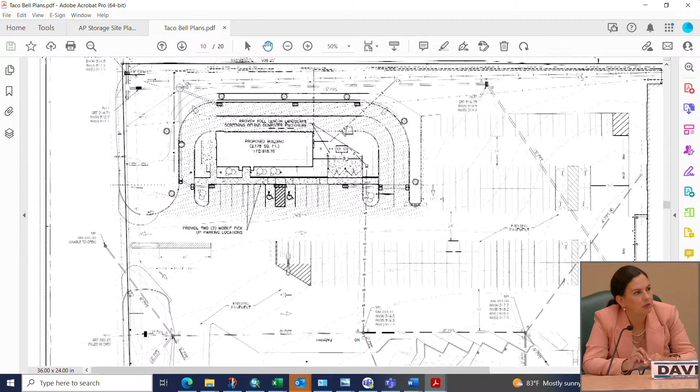And I believe that we have added also some pervious area on the very left side of the drive-through exit. Up in here. Yes, that widened out a little bit from the initial. Other questions, comments from commission members? All right, if there's nothing else, we'll entertain a motion to approve.

We need to vote on the waivers first. So was it 3 waivers that were requested? I believe there were 3 waivers, yes. Do you want to do those individually? Yeah, that's probably the cleanest way. So let's go through. One was for stormwater on the pipe. Did they write up the waiver requests? Yes, I believe there was a separate page for waiver requests. Okay.

I believe the first was due to the scale of the plan. It just showed up better as a 1 to 30 scale, just so you could see more detail. So we were asking for a waiver from the subdivision and land development ordinance for that. Standard. One was for infiltration, volume and rate control. Okay. And then the third waiver that we had asked for was for the stormwater pipe sizing.

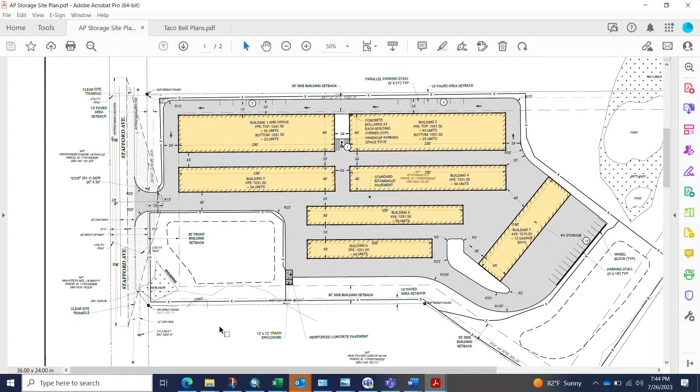So we have one significant stormwater calculation, that their stormwater system sizing doesn't work. And they have to get an NPDES permit. So it's kind of not really ready for approval. Okay. Sorry, I couldn't catch the tail end of that, Tom? So the one stormwater comment is very significant. We have the new sidewalk comment, which, do they need sidewalks or not, which we haven't really discussed, but then we might want to just look at that together so that we can give them guidance.

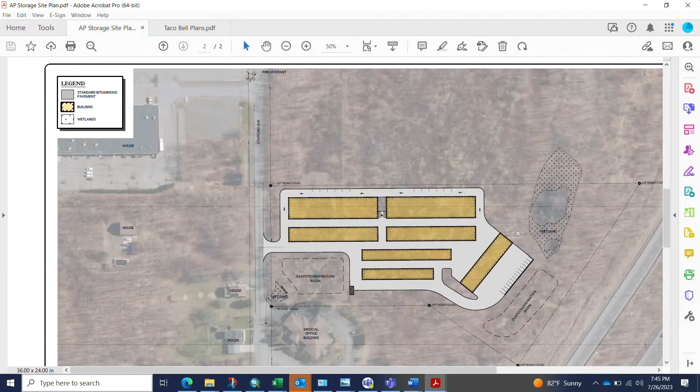Yeah, that'd be great. But the stormwater drainage system shall be designed without surcharging inlets, which basically they haven't provided. So basically what happens is the pipe capacity is not big enough. So when you route the storm drainage, the water backs up in the inlets, which doesn't meet the code. Okay. So you'd like them to address that before we approve the plan? It's a whole set of piping calculations that need to get redone. Sure, that makes sense. Yeah, let's talk about the sidewalks then.

Yeah, can I first note that I think the address is wrong, because it shows that the address is on one side of the street. So it's on the 81 side of Stafford Avenue. It's on the 81 side here. And as you can see, this is a road, and there's no walking that's happening here, and there's no retail businesses at all. No. Across the street, you go down far enough, there's the post office, and then an Econo Lodge. Right. But at this point, you're a mile away from significant residential. Yeah, if you wanted to go to the post office, you'd have to walk in the street, or off in the grass somewhere. But yeah, none of Stafford Avenue has sidewalks.

So I think in each of these cases where they don't provide any sidewalks, they should ask for a waiver with a justification. Sure. Yeah, I agree with Gus. I don't see a need for sidewalks here. And also, this use is a storage facility. Nobody's going to be walking to that. You're pulling up your car and your trailer. Okay. So we'll table that one for tonight. I think you can take that back to when you have discussions with the developer. We don't see a need for sidewalks, so they can put in a waiver for that, and then iron out the permitting issue.

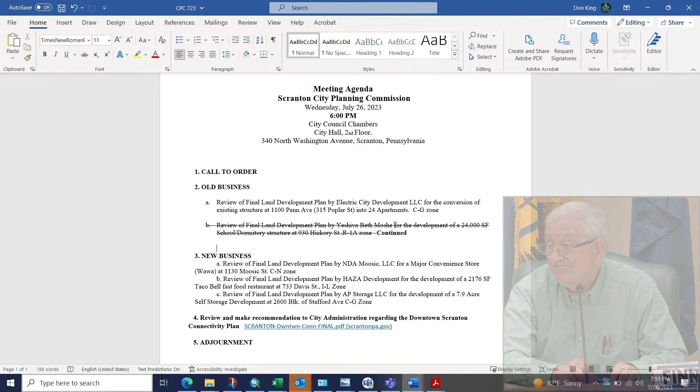I mean, I've been through it, and I was glad to watch the video presentation of the author of the plan. I thought that was helpful too. But there's a ton of detail in there, and I think it's deserving of, as I said, a single item agenda. So the conversations we're having with the mayor's office is that there's additional study needed to go forward, both traffic modeling and engineering analysis of different intersections that are recommended to be changed,

and that as part of that process, which also relates to some of the streetscape projects that are in the planning phase, there's going to be several public meetings where we're going to make significant outreach to residents and property owners that are affected, and I think it would be good to have a significant role for the Planning Commission to get involved in some of those meetings and get your input and hear from the public, because we're going to be reviewing the technical issues with PennDOT, getting their input, and in some of our conversations with PennDOT, they're saying, we'll support you, we'll go through the process with you,

and we both, by our internal conversations and our conversations with PennDOT, realize that this will affect a lot of different people who travel through the city, people who own property in the city, people who walk and bike, and that it's important that everybody understands what the reasoning is, and that they see the more in-depth analysis, and they get to give their input, whether they like it, whether they have issues with it, and help shape how this gets implemented. So it's not just going to be a quick recommendation, and then we're going to be issuing construction plans.